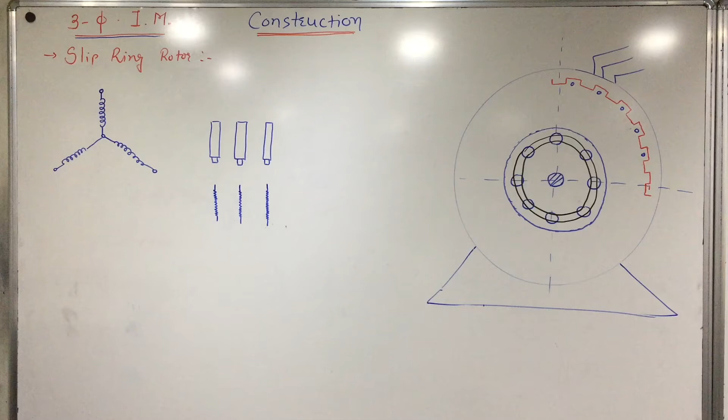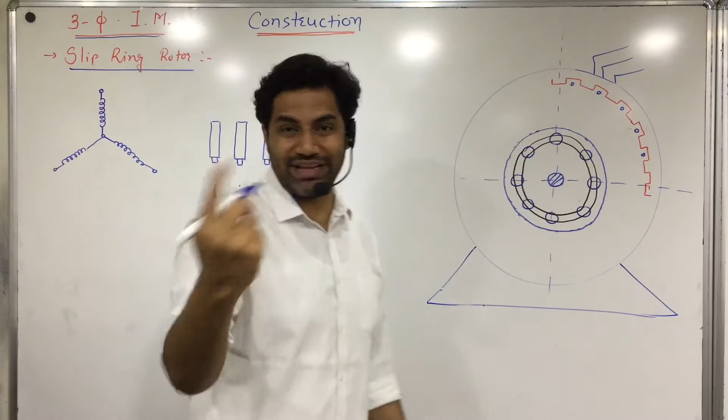Well friends, let's deal with the slip ring rotor, also called wound rotor or phase wound rotor. When we talk about constructional details, the rotor is like a rotor only, but these other things are not there. This is removed, and instead we have some slots.

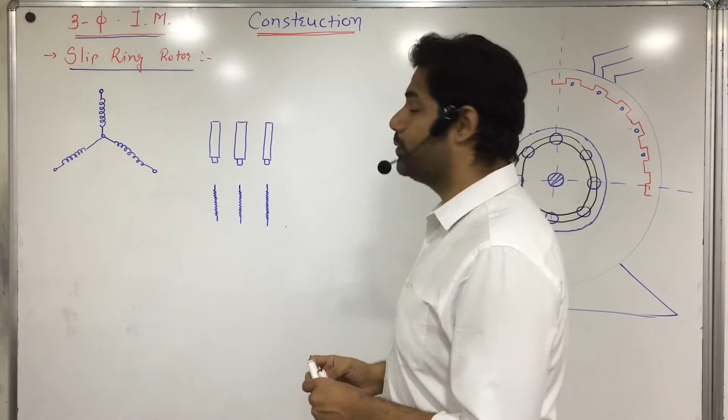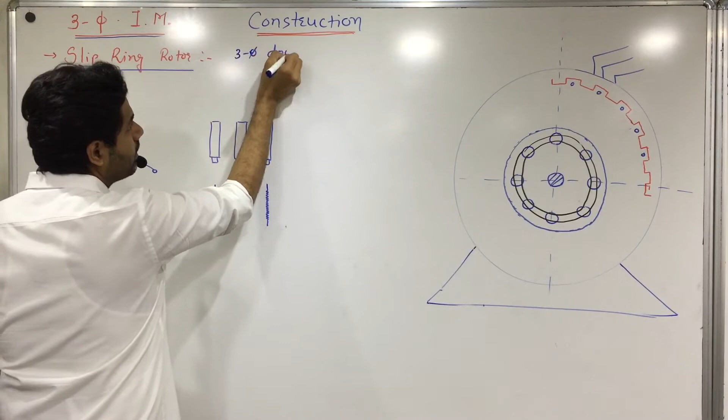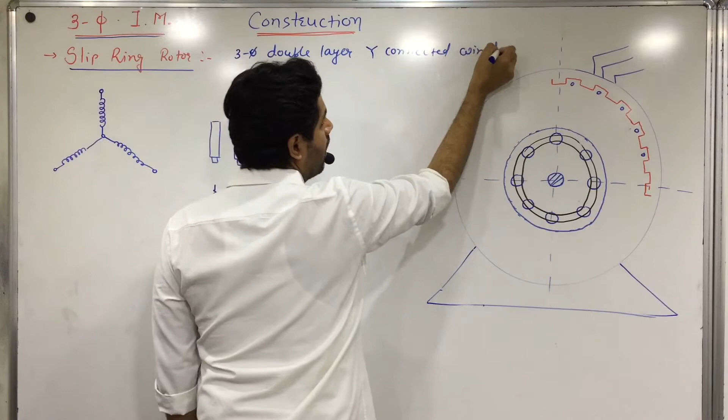In the slots, a three-phase double layer star connected winding is provided. So in construction, what do we see? A three-phase double layer star (Y) connected winding is provided in the slots.

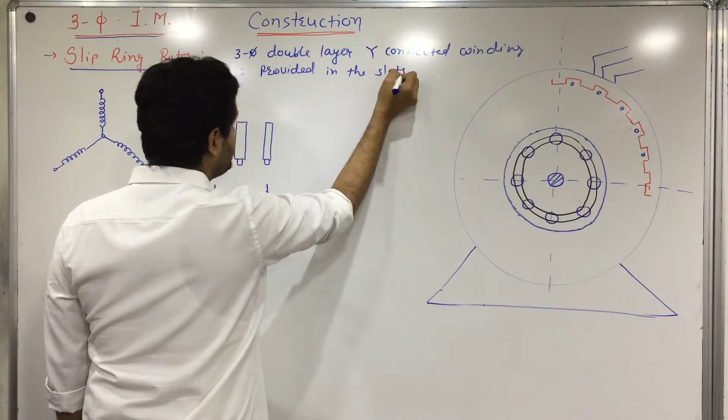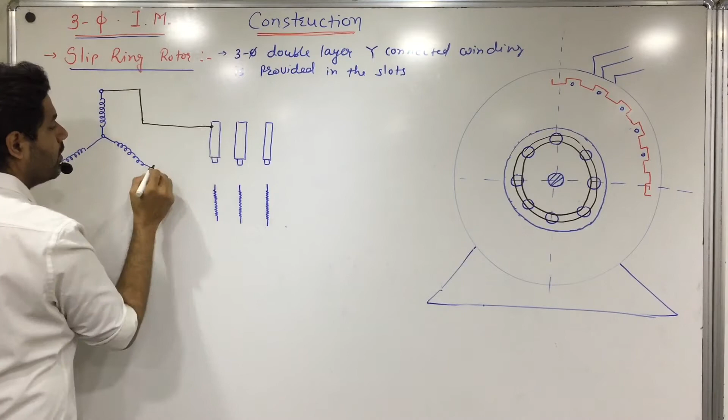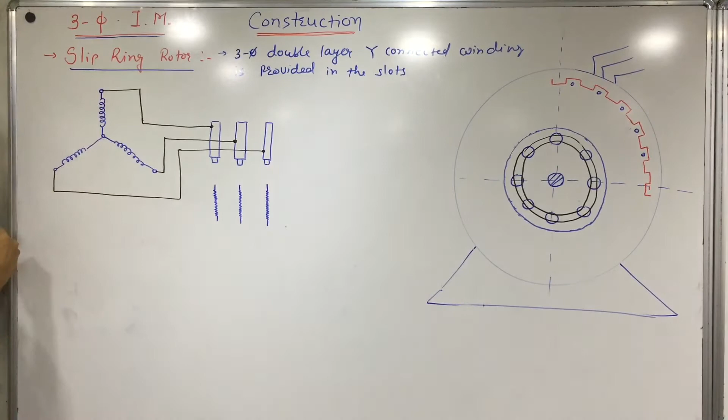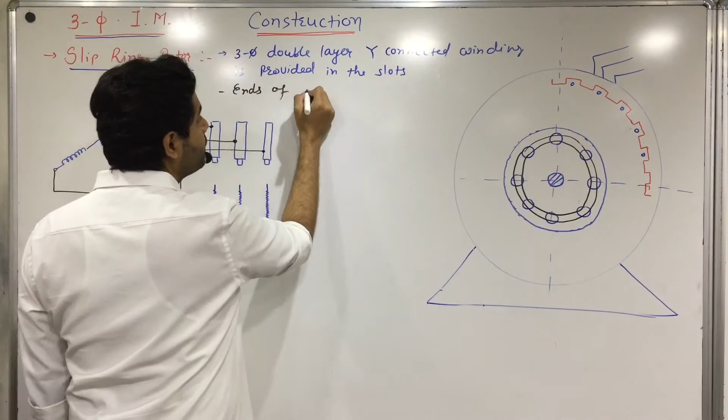Now these windings are connected to what is called a slip ring. So the windings are connected to slip rings. The ends of the windings are connected to the slip rings.

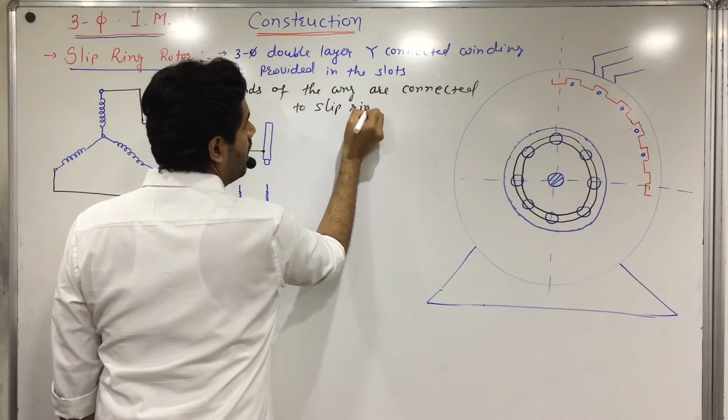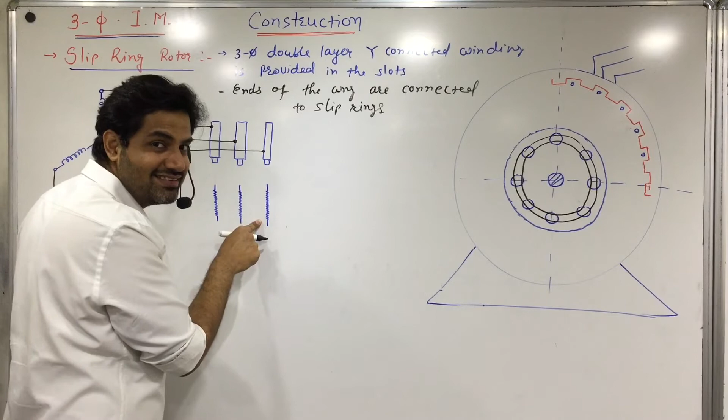Now slip rings are connected to external resistances, since we need external resistance at starting. So the slip rings are connected to external resistances via brushes. Something that is rotating needs a brush along with it.

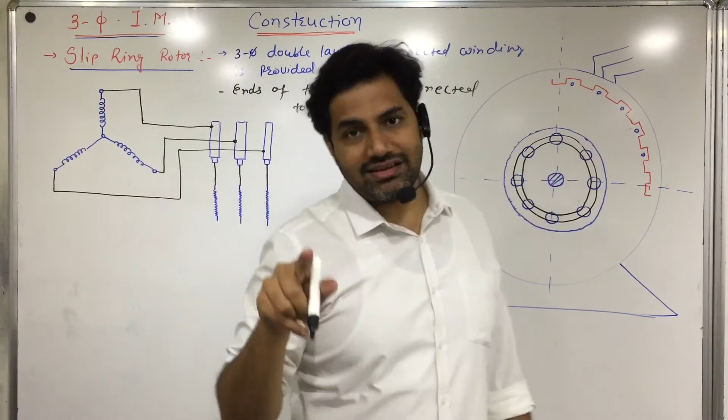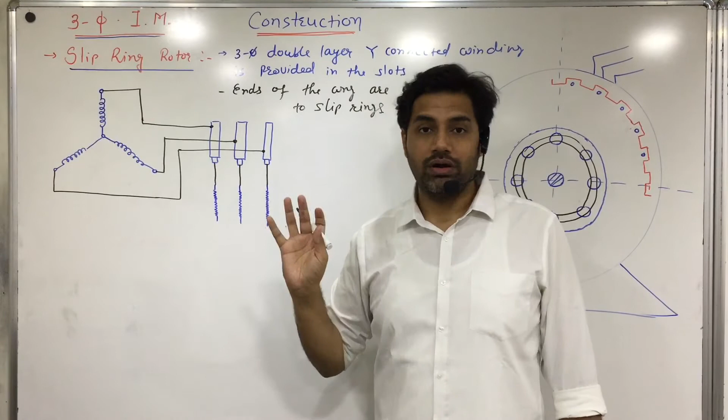Now, I need extra resistance at starting, but as I mentioned, during running condition that extra resistance reduces the torque. So at starting I want it, but later I don't want it.

Again: a three-phase double layer star connected winding is provided in the slots. The ends of the windings are connected to slip rings. Slip rings are connected to external resistances via brushes. At normal running conditions, I don't want this resistance, so there is a centrifugal switch. This is how that works.

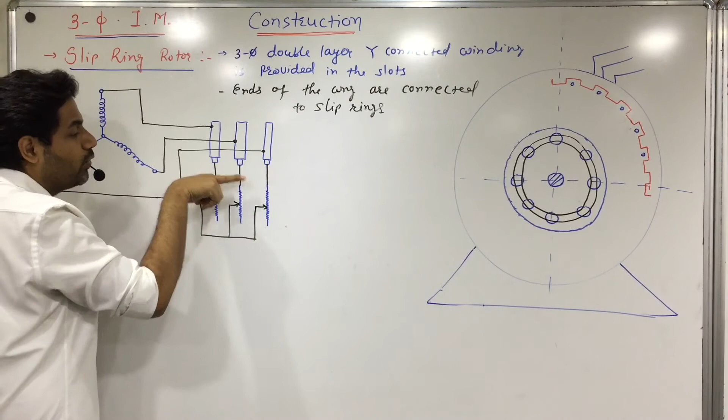Initially at starting, this point is over here, this point is over here, this point is over here - the whole resistance comes in series with the winding. At normal running condition, the slip rings are automatically short circuited. These arrows come over here, over here, over here, so they get shorted and the resistance is bypassed.

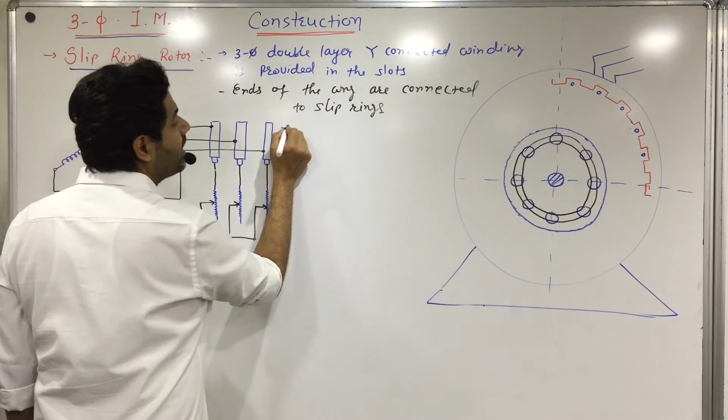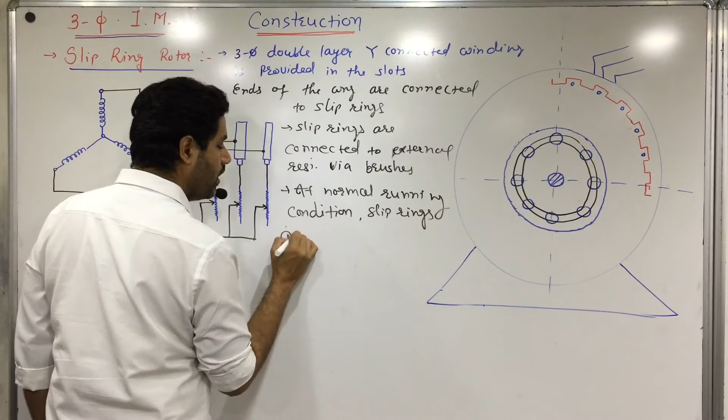Ends of the windings are connected to slip rings. Slip rings are connected to external resistance via brushes. At normal running condition, slip rings are automatically short circuited.

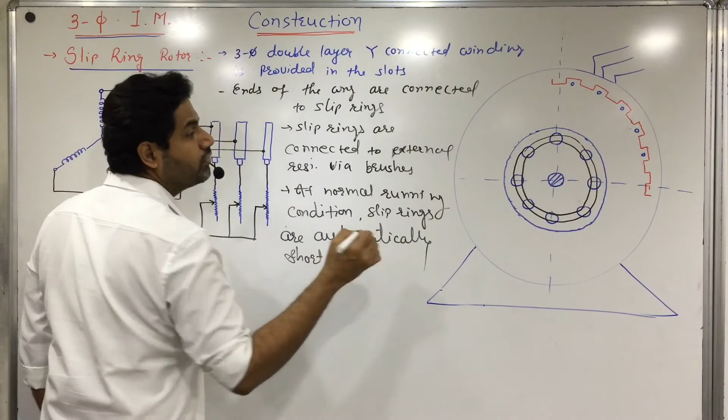So this much is the theory that you're supposed to write. Is it clear? So we understood the stator, and we understood the rotor.

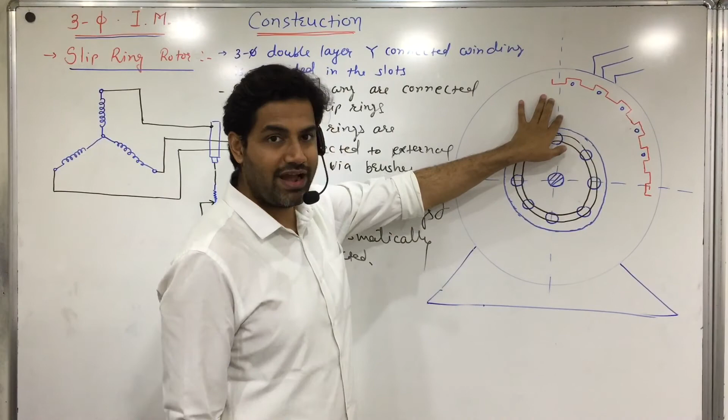The stator is the most rugged part, made up of magnetic material. The slots are provided in the inner periphery, and magnetic stampings are utilized. Slots are provided in the inner periphery to receive the winding.

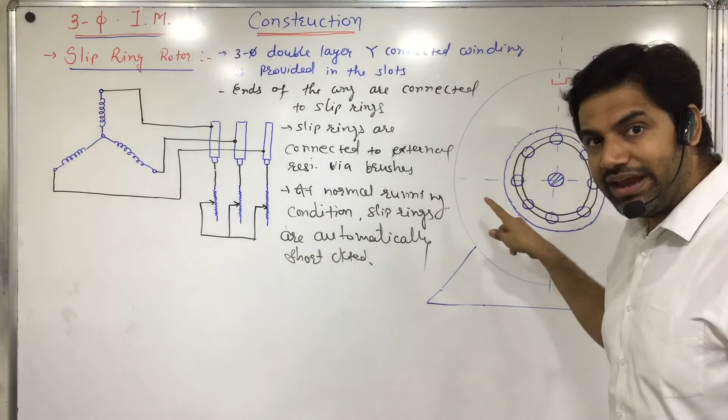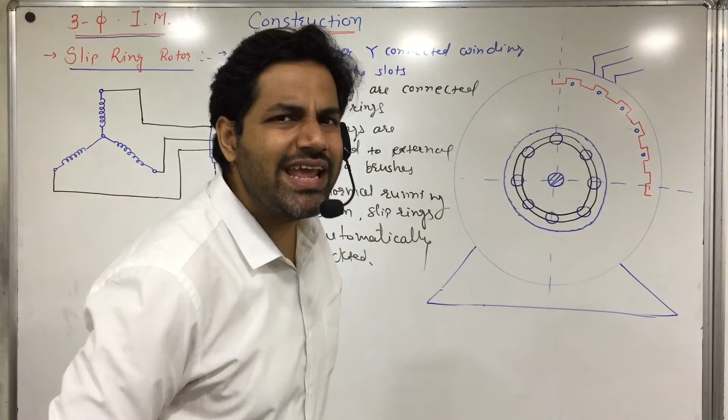That's it for stator. Rotor - there are two types: squirrel cage rotor and slip ring rotor. Squirrel cage rotor has the most rugged construction, with slots on the outer periphery. Copper aluminum alloy bars are provided in the slots, and the bars are short circuited by heavy copper rings from both sides. As they are short circuited by heavy copper rings, it is impossible to add any extra resistance for starting purposes. The slots are slightly skewed to prevent magnetic hum and locking tendency.

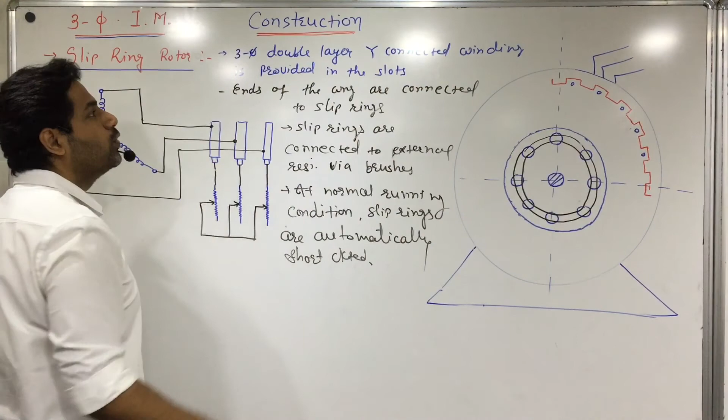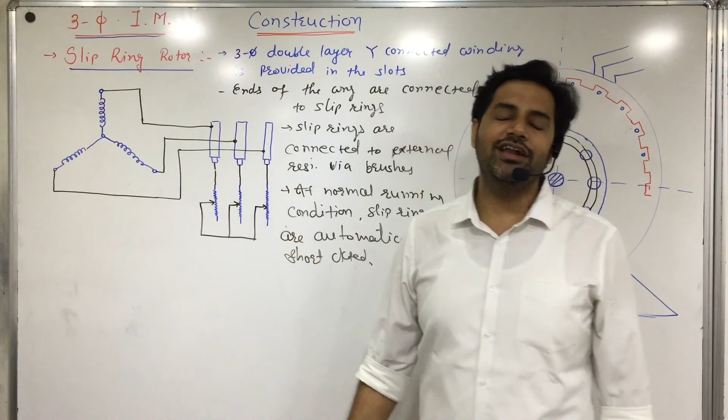Then we have seen the slip ring rotor. A three-phase double-layer star connected winding is provided in the slots. The ends of the windings are connected to slip rings. Slip rings are connected to the external resistance via brushes. At normal running condition, slip rings are short circuited. Is it clear? Write it down.